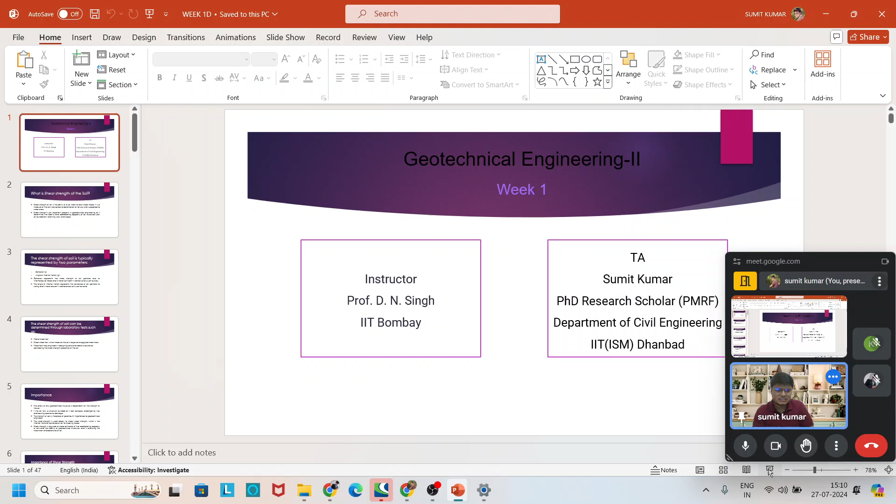Our course name is Geotechnical Engineering Two, taught by Professor D.N. Singh sir from IIT Bombay. This course has been taught with so much simplicity that if you have gone through the lectures, you understand that practical implementation is taken care of at each point during this coursework. First of all, I will start with the basic concepts regarding the course we are going to take, geotechnical engineering.

So first of all, what is geotechnical engineering? Geotechnical means in geotechnical engineering we are talking about the soil. Soil mechanics is geotechnical engineering in itself. At some places it is called Soil Mechanics 1, Soil Mechanics 2. At some places it is called Geotechnical Engineering 1 and 2. So in these aspects, we talk about soil and its characteristics.

What are the properties of soil? How does soil behave? Basically, we know that all the buildings, all the infrastructure, any road network, any railway network, every aspect of the construction business - all things are standing on the soil itself. It is not possible to imagine any structure without soil.

Have you ever imagined that in any construction work, soil is not a participant? Any structure, starting from a basic building block - in the old time, huts were constructed, and they were also constructed on soil. As advancement takes place, we created RCC structures, steel structures. In subsequent times, earlier roads were only earth work, then bricks were there, now concrete roads are there. So everything is established on soil.

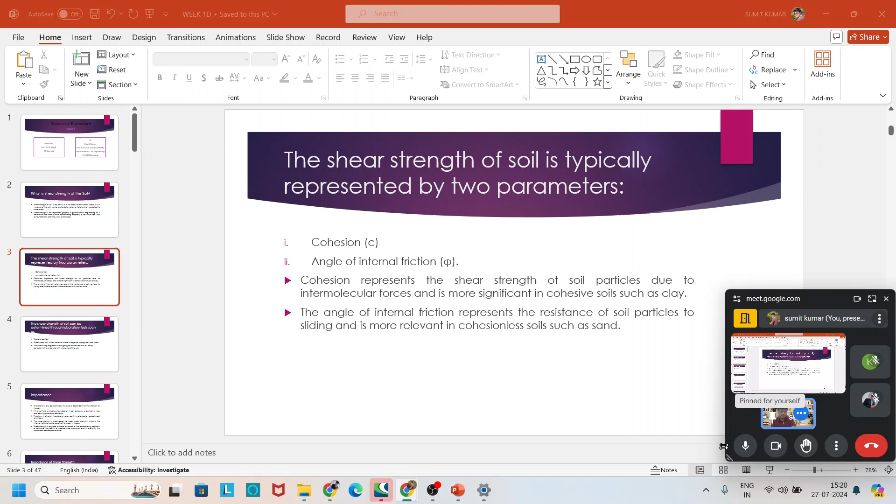As the name suggests... okay, I think I am audible. Hello, okay. So, as the name suggests, cohesion is the factor responsible for shear strength which depends only on cohesive soil. And the cohesive soils are like clay.

Now we talk about the second parameter, the angle of internal friction. The angle of internal friction represents the resistance of soil particles to sliding, and it is most relevant in cohesionless soil like sand.

So one more question arises here, because the answers lie in the question itself. If we ask a question, we get some answer. So the second question arising here is: is there some soil which might have both cohesion as well as angle of internal friction? It is not like that, no.

At some place the cohesion is 50 kilopascal and the angle of internal friction is 0, and at some other place the angle of internal friction is 30 and the cohesion is 0. This may be the case in some places, but in most cases it has been found that some cohesion factor is also there and angle of internal friction is also there. So both combine to give strength to the soil.

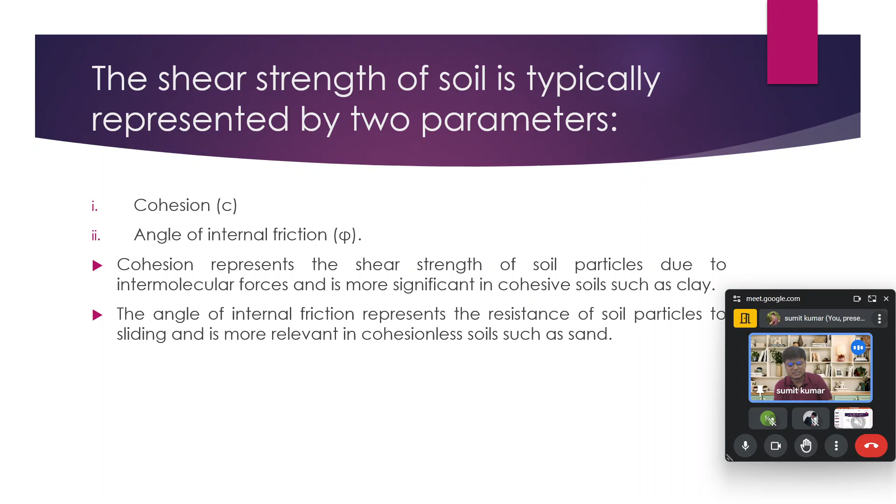Now, as I am talking about how these parameters could be found - the shear strength of soil can be determined through laboratory tests, like the triaxial test. In the triaxial test, we perform and see step by step each and every part of it, and also the direct shear test. So I will give a brief overview. In the triaxial test there are three tests: UU test, CU test, and CD test.

We will talk about that in detail in the subsequent slides, and in more detail in the next class as well, because that part of the syllabus has been covered there, and we will also solve some very good problems on these two aspects, because as per my knowledge, by the end of this course you all have to go through them.

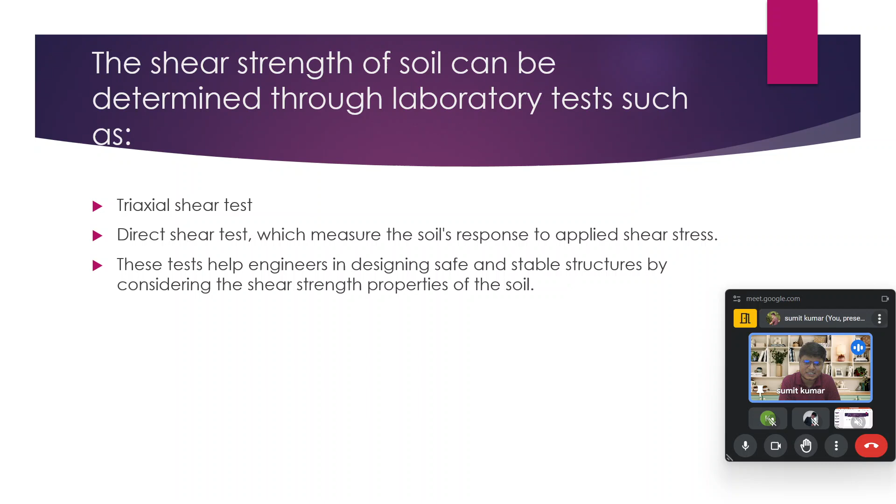First of all, we have discussed the importance, because anything which we are studying must need to have some importance. Without importance, if we are taking anything, it doesn't matter. In day-to-day activity also, we consciously or subconsciously always ask, is it important for me? Subconsciously we ask, but sometimes we also ask consciously. So conscious decision in that regard will always be helpful for us.

So I will start with the importance. The safety of any geotechnical structure depends on the strength of soil. Basically every soil has some strength, and the structures may be multi-story buildings, bridges, tunnels, roadways, or institutional buildings like schools and colleges. Everything stands on the soil. So first of all, we need to find the strength of the soil.

As you know, if some of you are working in any companies, you see that before the construction of any structure, first of all they will call for the soil report. The company does the soil investigation, does the boreholes, finds the soil parameters like the unit weight, and also finds the cohesion and friction angle. They also find how much strength is there in the soil itself to sustain the load which has been applied on those structures.

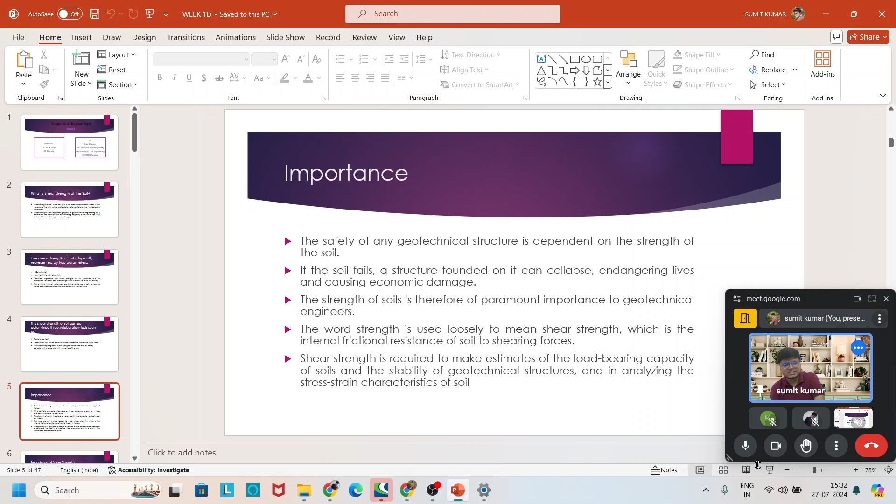Okay, I will take a pen over here, because if something needs to be added, I can add it. Let me take a laser pointer. So the shear strength is required to make estimates of the load bearing capacity of the soil and the stability of geotechnical structures, in analyzing the stress-strain characteristics.

So in the subsequent slides, in today's class itself, we are going to talk about what are the most important factors. We are talking about the Mohr circle. Okay, am I audible now? Hello? Yes.

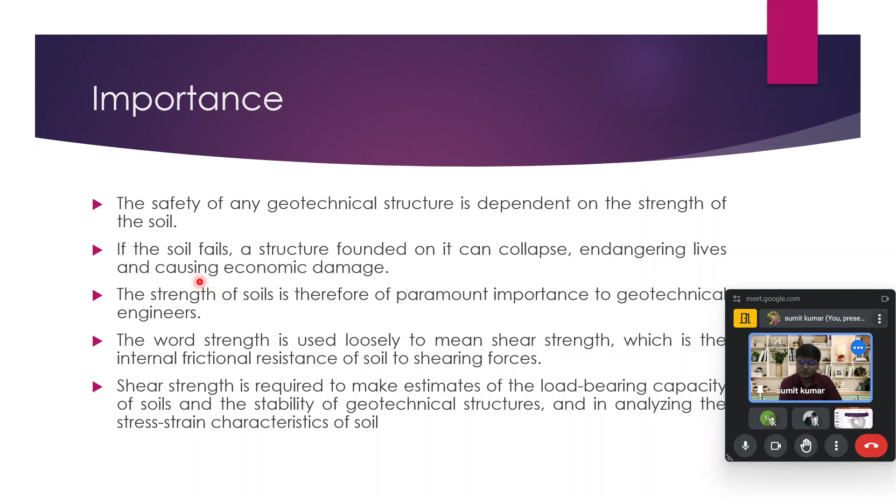Okay, so now we talk about the importance of shear strength. The shear strength is a critical factor in geotechnical engineering, as it determines the stability and behavior of soil under different loading conditions. Understanding shear strength is essential for designing foundations, slopes, retaining walls, and other structures, because everything depends on the soil, and the soil has strength - that is the shear strength - which amplifies the factor of safety and determines how much load it can sustain.

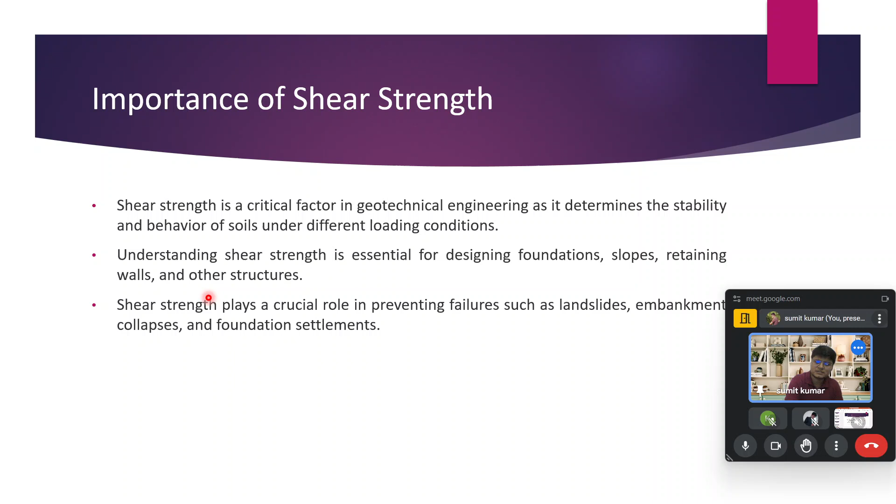Now we are going to see some diagrams with the help of which you can understand these factors very easily. The shear strength plays a very crucial role in preventing failures such as landslides, embankment collapse, and foundation settlement. Knowledge of these factors will help us understand the extent of damage we could reduce before designing structures over those soils.

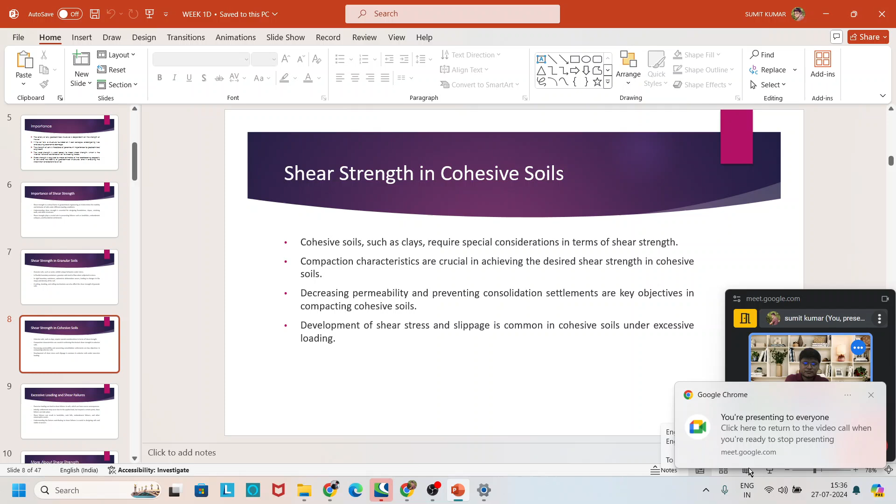See, my slides are visible now. Okay, no problem, I think so. Slides are visible. Let me check again because I don't get you. Okay, so it's okay, it is visible. I can see from my system as well. Okay, so we are talking about the shear strength of cohesive soil. Let me recall this slide as well, because I think some connection problem is there.

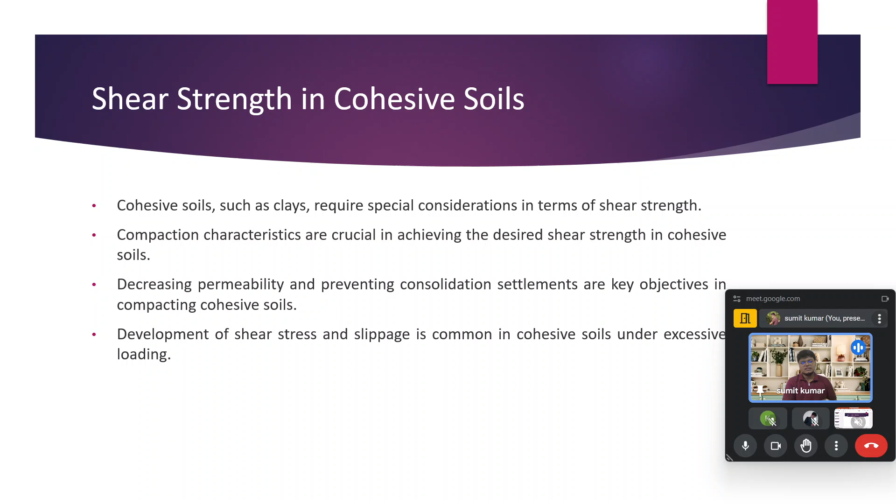So the shear strength in cohesive soil. Cohesive soil such as clay requires special consideration in terms of shear strength. Compaction characteristics are crucial in achieving the desired shear strength in cohesive soil. Decreasing permeability and preventing consolidation settlement are key objectives in compacting cohesive soil. Development of shear stress and slippage is common in cohesive soil under excessive load.

Okay, now we'll go ahead to talk about excessive loading and shear failures. Okay, I have doubt whether the slide is visible to you or not. Let me reshare my screen because I don't get you. I will stop sharing and reshare my screen.

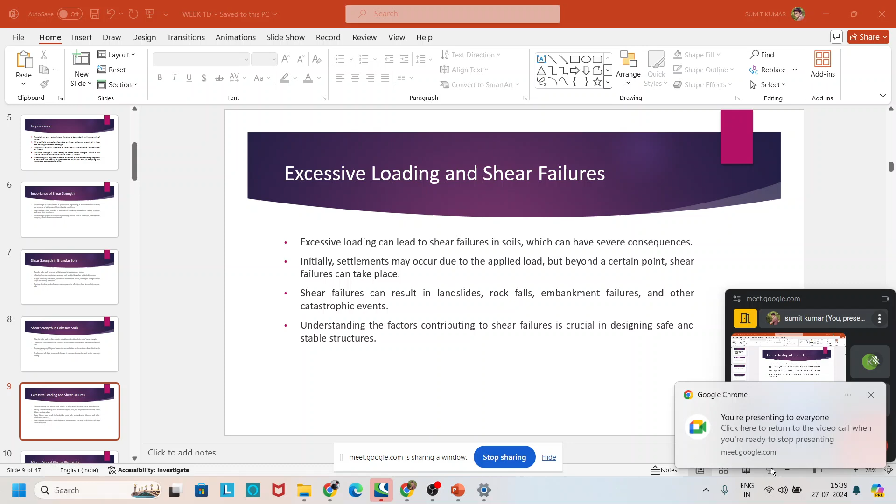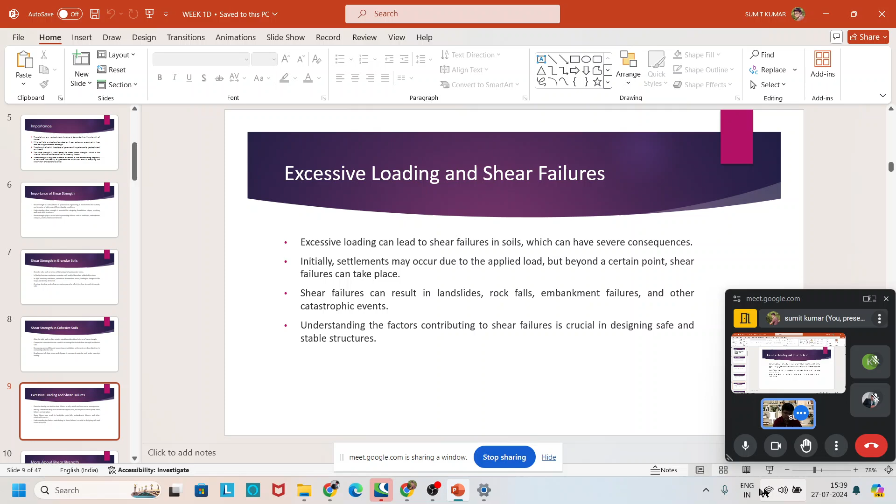Okay, excessive loading and shear failures. Is this slide visible now? Yes. Okay, so excessive loading and shear failures.

Excessive loading can lead to shear failure in soil, which can have severe consequences, because if the load applied is more than the allowable load, it will lead to failure of soil, leading to damage to the structure. Initially settlements may occur due to the applied load, but beyond a certain point, shear failure can take place. When we talk about strength, as we are most aware, like for example, a structure which can sustain.

Take an arbitrary example. For example, if a structure can sustain a load up to 100 units, so if we apply 90 units, it will sustain, there is no damage. We apply 95 units, no problem. 96 units is also acceptable. If we apply 99.99 units of load, it can sustain in that position without any problem. But if we increase the load from 99 to 100, it is on the verge of failure. And if the load just exceeds from 100 to 100.1, it will collapse.

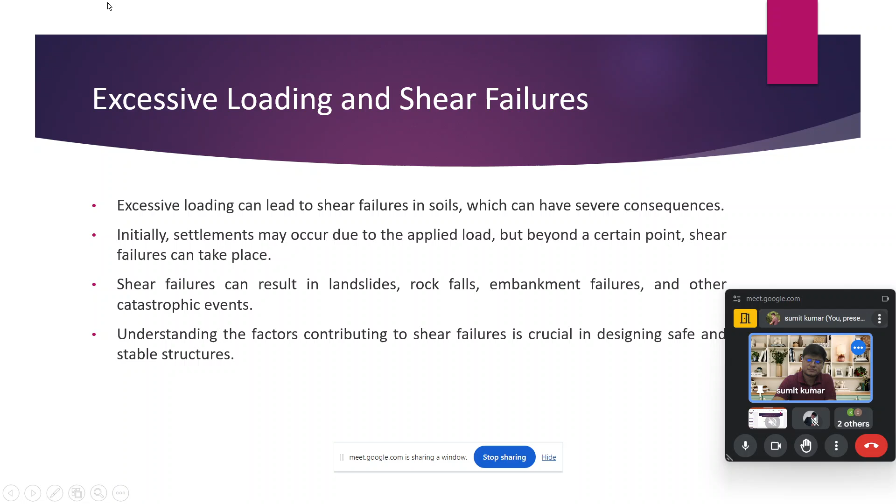Okay, so excessive loading can lead to settlement and shear failure.

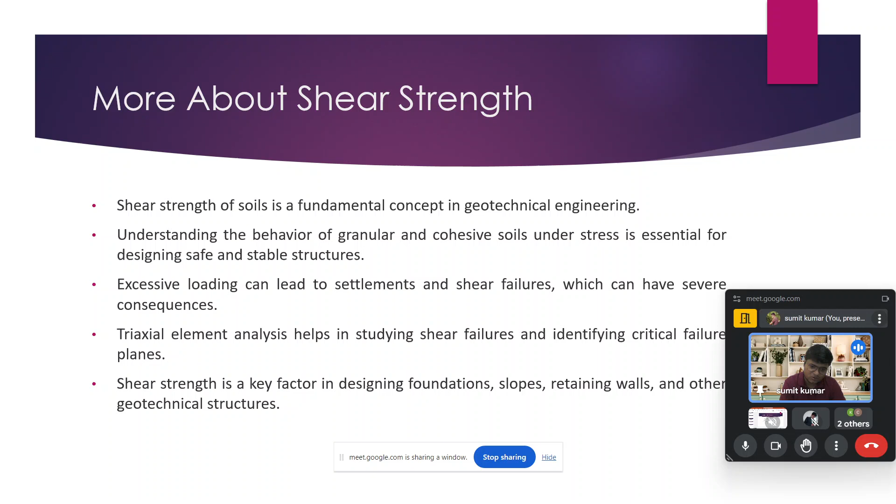The shear strength is one of the key factors in designing the foundation, slopes, retaining walls, and different geotechnical structures.

We talk about the state of stress in soil. The state of stress in soil is described by the normal stress and shear stress. We will talk about how we calculate it, how we find the principal shear stress, how we find the maximum and minimum, in the Mohr circle how we find the origin, and how we find shear stresses like Tau max. We are going to discuss all these things in today's class, and some problems are also there at the end of the slides.

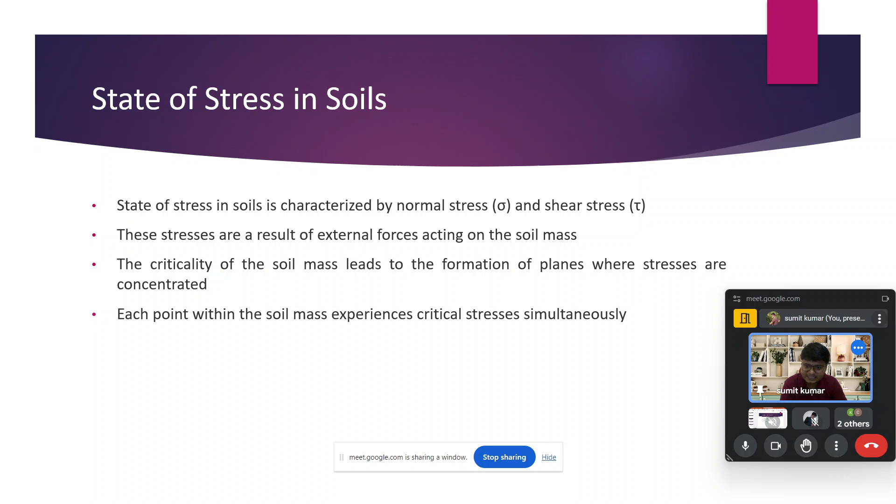The stresses are a result of the external forces acting on the soil mass. The criticality of the soil mass leads to the formation of planes where stresses are concentrated. Each point within the soil mass experiences critical stresses simultaneously, as I have discussed in class, if you have gone across the video.

See, the load has been applied, and if you can imagine this 3D body, you can see that failure takes place at a point. The load is applied over there, and there is a section which has been detached from the original body, and another section.

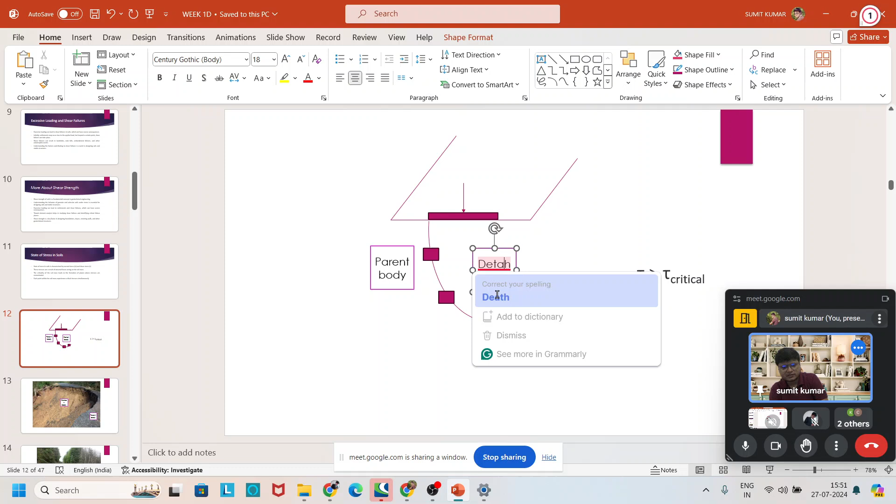I think it is visible to you now. So one is a detached body, some spelling mistakes in there, no problem. I think now it is visible and clear to one and all. So one is the parent body and the other is a detached body.

You can see from this slide the load has been applied, and as I discussed in the earlier example, the load is applied to the overall structure, but it fails from a specific section - that section is the critical section. During the stress calculation, we have to find the critical surface from where the failure takes place, and after determining that critical surface, we are able to find how much load it can sustain, because the minimum load it can sustain will be said to be its strength, since failure takes place from that section.

So if we construct any structure and the load is more than that, it is going to fail. In no case are we able to save our structure. So it is very important to understand how much load we could apply on any structure before its failure.

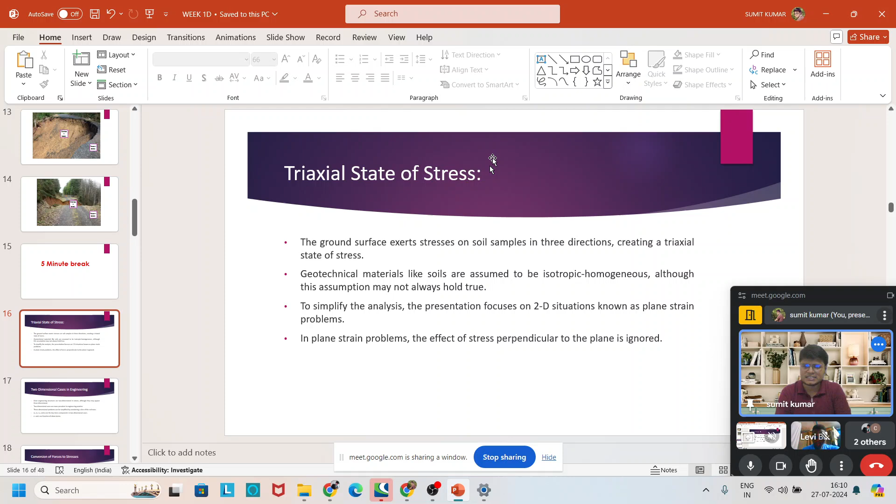I will go two slides back to the image I discussed earlier, since I found two more new people have joined. I will start from the basic aspects there, so that no one misses anything and no one feels it is an entirely new topic.

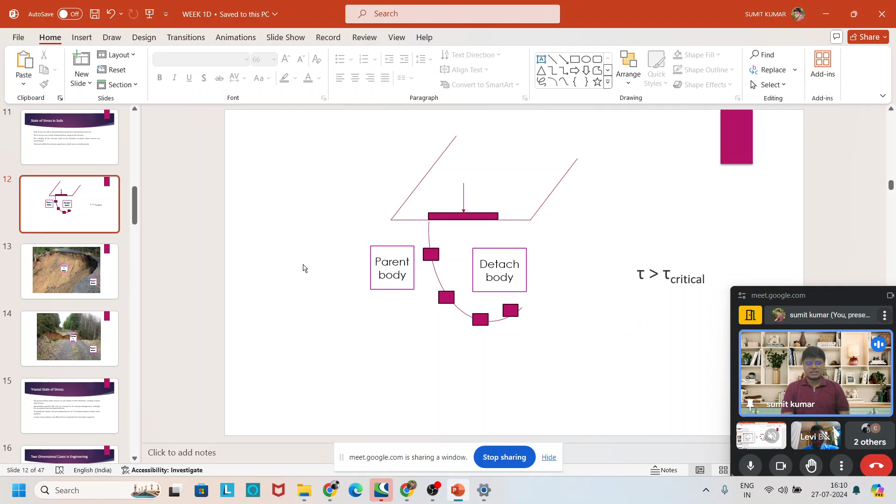Okay, so over here we are discussing about the state of stress, and after that we came along the failure surface. We talk about tau and tau critical. We discussed that when a load is applied on soil, failure takes place from specific places, not just anywhere, so we have to identify the critical surfaces. In the triaxial test, we are able to find the critical sections from where the failure takes place.

From this diagram you can see real images in the subsequent slides. The parent body remains at itself and the body that gets detached will be on the right hand section. So some amount of stress has been applied there in order to detach this body. If the force is not there up to the extent that overcomes the strength of the soil at that place, it is not possible that failure takes place at this point.

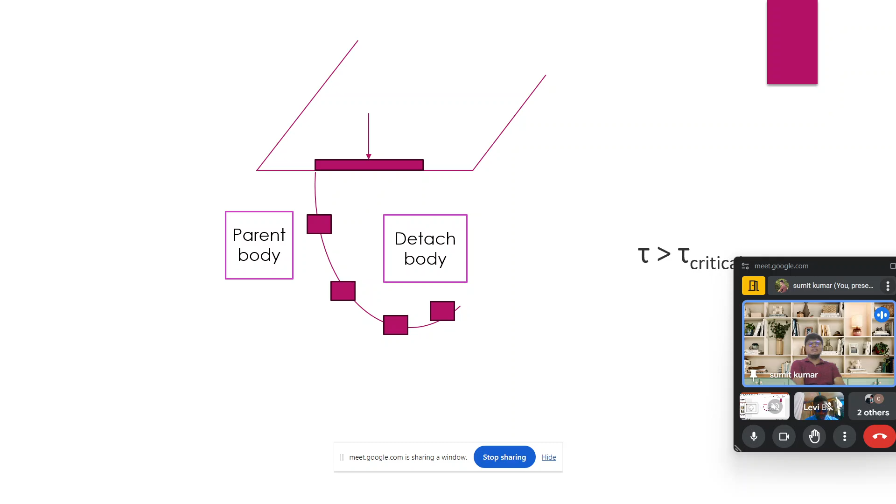So the applied force, tau, is above the critical force. The critical force is the strength of that soil which it can withstand, so failure takes place at that section. You can see the images here too. The detached body and parent body are clearly visible, and you can find that the detached body gets separated from the parent body from a specific section, not just from any section. So in one way we can say this is the critical surface from where the failure takes place.

So for the strength of soil, if you take cross sections of 5 or 6 meters, or maybe 10 or 20 meters, say in a 20-meter section, this is the most critical section. Over there the strength is minimum, so the soil gets failed from here.

Okay, okay, I think so. Okay, so I will move ahead.

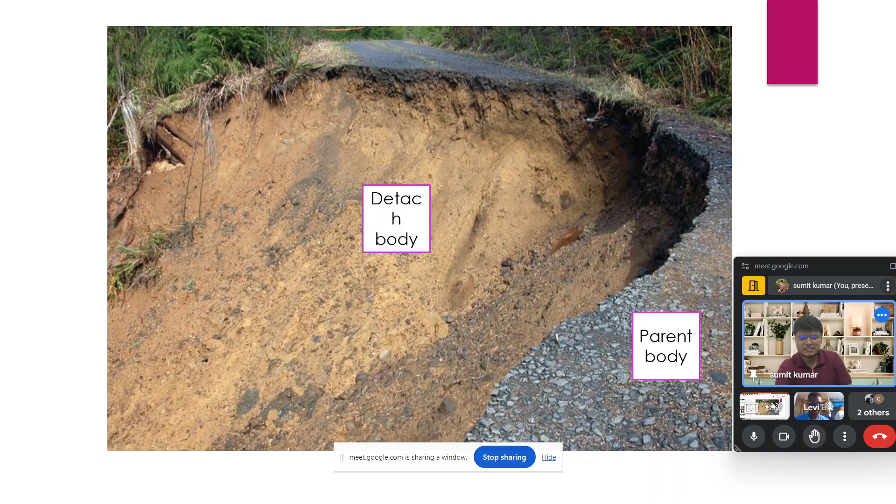So this is the similar diagram again. Over there, the parent body, detached body, and critical surface - I discussed this thing earlier before taking my break. So I will discuss briefly here for the new person who joined. I found two new people joined in the meanwhile, so that's why I will discuss again. So I will go ahead.

Okay, so we talk about the triaxial state of stress. From here onward, we will discuss the triaxial state of stress. Over there, we will discuss the Mohr circle problem - how it gets solved, how we are able to find the maximum principal, minimum principal stresses, how we find the maximum shear stresses, and subsequently we will end today's class. Afterwards, we will meet in the next class.

At the end of this class, we will solve some numerical problems, which are the key aspects we bring from today's class. And in subsequent classes, we will discuss tests and the problems generated on the basis of those tests.

Okay, so I start from the triaxial state of stress. The ground surface exerts stress on the soil in three directions, creating the triaxial state of stress. Geotechnical materials like soils are assumed to be isotropic and homogeneous, although this assumption may not always hold true. We know this from basic soil mechanics concepts, so I don't think it needs to be explained in that manner here. To simplify the analysis, the presentation focuses on the 2D situation known as the plane strain problem.

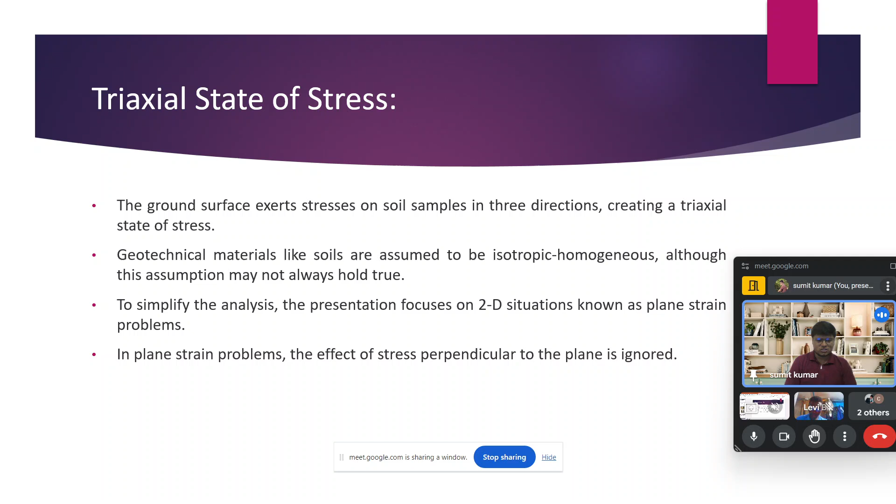So be patient and see the slides. We have taken the 2D situation known as the plane strain problem. In a plane strain problem, the effect of stress perpendicular to the plane is ignored. What I have discussed right now is that thing only.

Now we carry forward the same point, that most engineering structures are two-dimensional in nature. Although they may appear three-dimensional, two-dimensional cases are more prevalent in engineering practice. We always see that if we can do calculation in two dimensions instead of three, we always prefer the two-dimensional approach, because the calculation and problem solving is more confined and easier in two dimensions as compared to three dimensions.

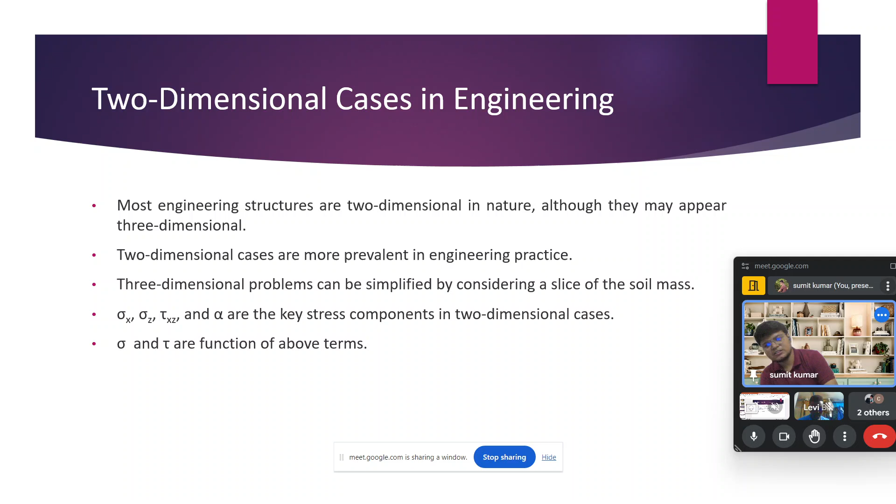Okay, I think the slide is visible clearly. So now we talk about the conversion of forces to stresses.

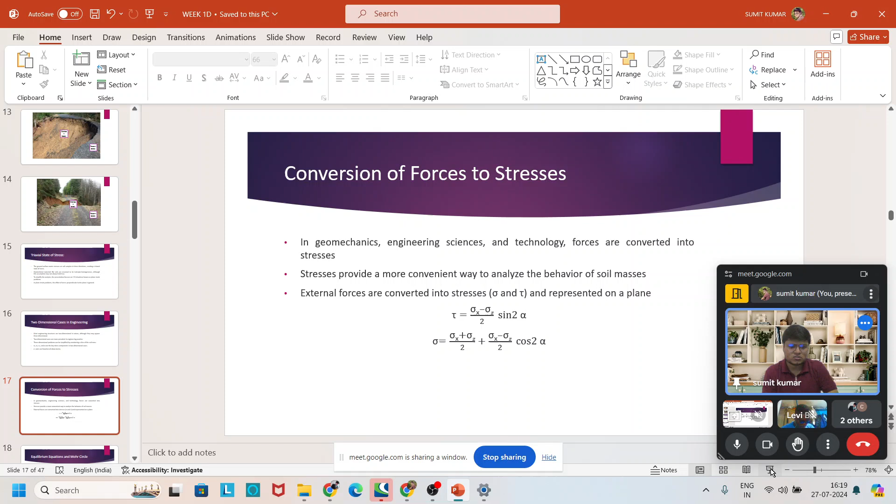So in geomechanics, engineering science and technology, forces are converted into stresses. We already know that stress provides a more convenient way to analyze the behavior of soil mass. External forces are converted into stress, that is sigma and tau, and represented on the plane.

Tau is nothing but sigma x minus sigma z by 2, into sine 2 alpha, whereas sigma is equal to sigma x plus sigma z by 2, plus sigma x minus sigma z by 2, cos 2 alpha. This is the standard relation. You must have gone through this relation in structures as well.

We will derive this relation also in the coming classes, but as of now you will understand this through the Mohr circle. I will explain up to that extent. Afterwards, during the course, we may derive these relations, but depending on our aspects, we may not derive them, we may cover more problems instead, so the derivation part you can go through from the lecture of the sir. But if that's not possible, I will cover it here as well. We will see how much time we get to cover those aspects. As of now you know this formula, and I think you would have derived this relation during your strength of materials class.

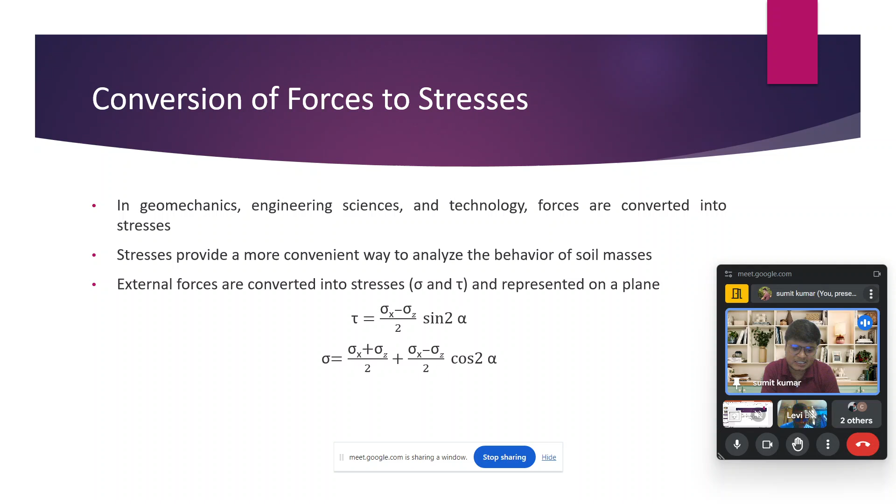And how are we able to calculate this in the other form? We also know how we are able to find the origin of this Mohr circle, and with the help of the knowledge of sigma x, sigma z, tau xz, which we talked about earlier, we are able to find everything required.

Because I studied a relation interrelating sigma 1 and sigma 3, as sigma 1 equals sigma 3 tan square (45 + phi/2) plus 2C tan (45 + phi/2). You can see, if you know sigma 1, sigma 3, or one of the aspects C or phi, and you know the soil is cohesive, so phi is 0, you can actually find the cohesion if sigma 1, sigma 3 is known.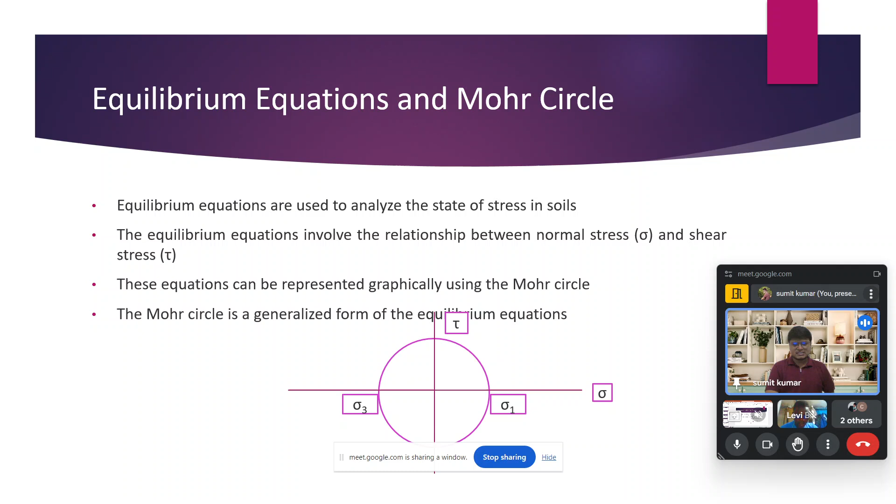So we will go ahead in that direction. If you are aware, you understand what I said. If you are not aware, that's not a problem, not to worry, because those aspects we will discuss in this coursework.

I will talk about some more points about the Mohr circle before moving to the Mohr circle itself. This presentation introduces the Mohr circle as a graphical tool used to analyze the state of stresses. The Mohr circle helps us determine the stress components sigma and tau at a given plane inclined at an angle alpha.

And what is that? The physical representation is also there; in the subsequent slide I will show that. And the steps to solve the problem using the Mohr circle are also one of the methods. We also solve the problem analytically, which is one of the analytical methods.

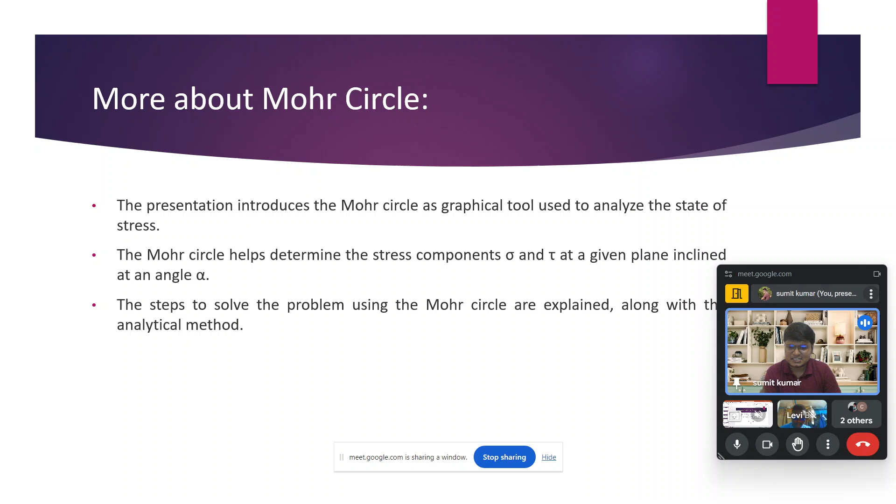With the help of the analytical approach, we solve the problem to find sigma 1, sigma 3, and sigma and tau. Okay, talking about the property, the Mohr circle must have some properties. What are those properties?

The Mohr circle is known to be one of the powerful tools for understanding the state of stress in materials, applicable to different materials like soils, rocks, and composites. We talk about these factors in the strength of materials course as well, because composites and other materials are applicable there too.

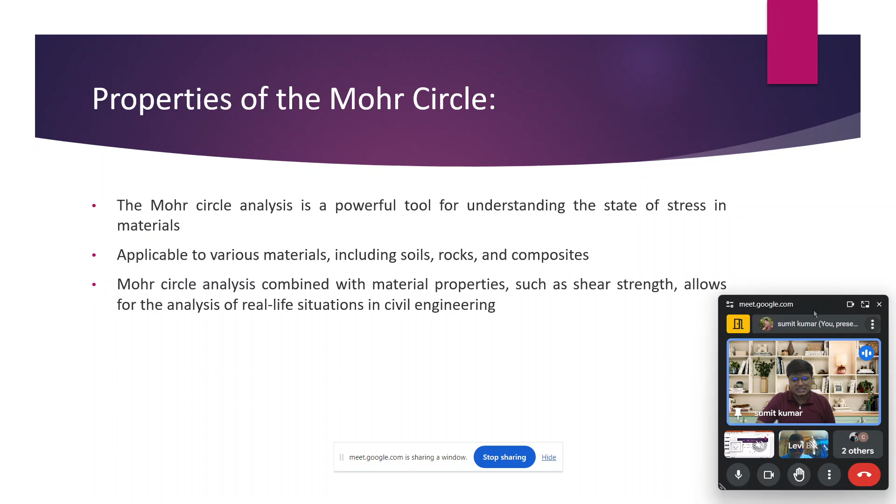And here the soil is a three phase system: solid, liquid, and gas. So it is also applicable here. Mohr circle analysis combined with material properties such as shear strength allows for the analysis of real life situations in civil engineering.

Okay, now I will show one of the images to you, so with the help of that you will get a little bit of an idea of what we are going to talk about.

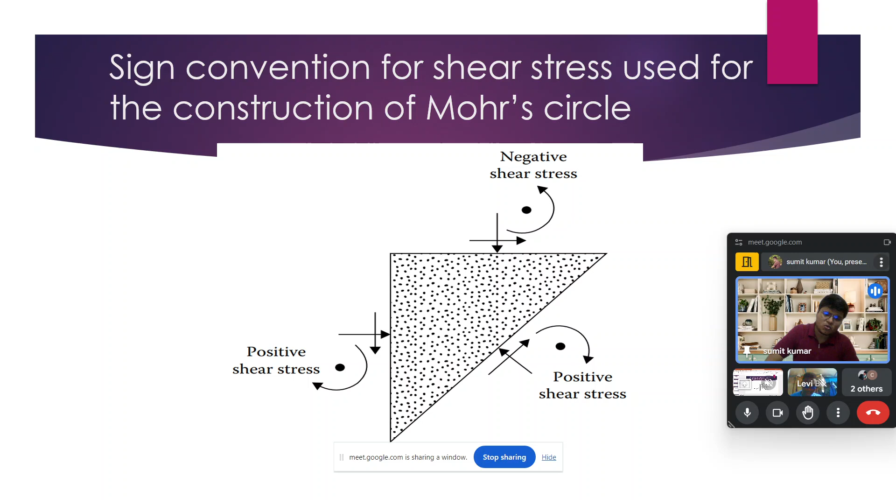So, the sign convention for shear stress used for the construction of the Mohr circle is shown over here, the positive shear stresses, the negative shear stresses, and how we found alpha. Everything we will see in the subsequent slides one by one.

So, the shear failure is one of the simplified solutions, and it is a common mode of failure in soils. In simplified solution, the focus is on the shear failure and the rigid body behavior. The Mohr circle is used to analyze the state of stress in soil undergoing shear failure.

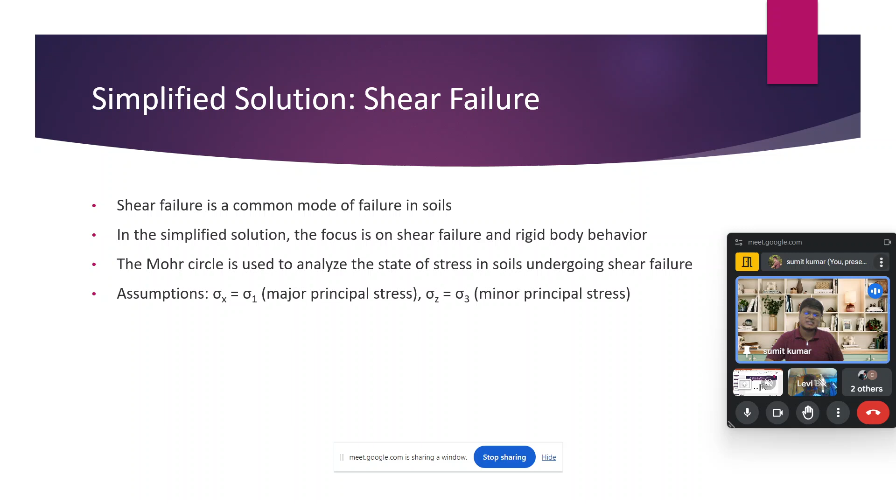There are some assumptions here, like if sigma x is considered to be sigma 1 and sigma z is considered to be sigma 3, that is the major and minor principal stresses respectively. You will see this with the help of a schematic diagram as well. I will show you in subsequent slides.

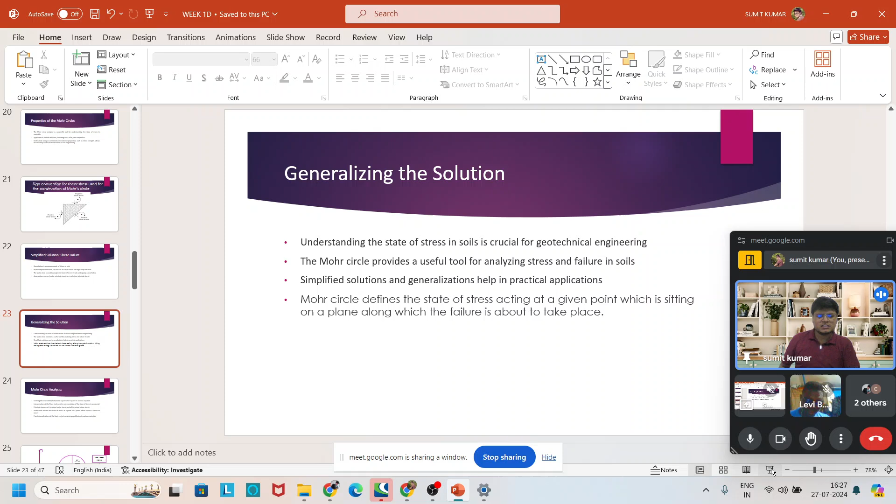We are talking about a generalized solution. We have said that the Mohr circle is a generalized solution. So, understanding the state of stress in the soil is critical for geotechnical engineers. The Mohr circle provides a useful tool for analyzing the stress and failure in soil. The simplified solution, generalizations help in practical applications.

And how it will help, we will see with the help of some examples. We will solve some problems and we will be able to see how that will help in solving real life problems.

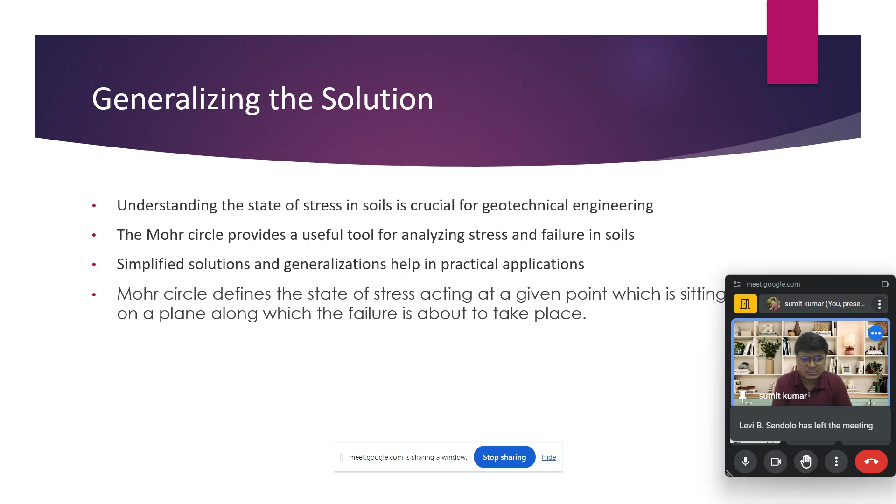The Mohr circle defines the state of stress acting at a given point which is sitting on a plane along which the failure is about to take place. And talking about the Mohr circle analysis, we derive the relationship between sigma squared and tau squared as a circle equation, and how it happens we will see with the help of a schematic diagram.

The interpretation of the Mohr circle and its representation of state of stress in a material, as we talk about the principal stresses, sigma 1 is said to be the major principal stress and sigma 3 is the minor principal stress. The Mohr circle defines the state of stress at a point on a plane where failure is about to occur, so we are able to find the critical section from where the failure is going to happen, and the practical application of the Mohr circle is analyzing the equilibrium in various materials.

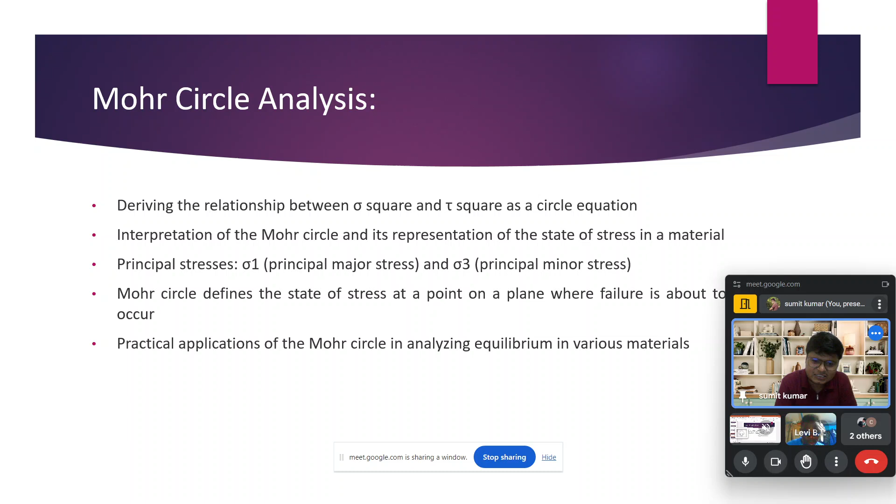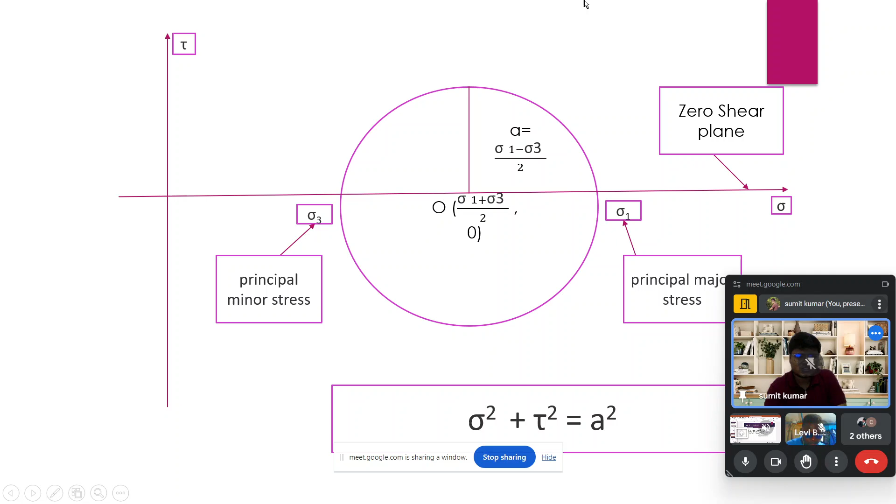Okay, so now I will show you one of the images. With the help of that you will get a better understanding. Give me a minute, I'm not able to move my slide due to some problem. Okay, I think the image is clearly visible to you now.

Yes, so you can see here the Mohr circle has been drawn. The x-axis is the sigma axis and the y-axis is the tau axis. As I already said, sigma 1 is the principal major stress, sigma 3 is the principal minor stress, and the normal axis is where the shear stress is 0.

From simple mathematics, you also know that for any point on the x-coordinate, the y-coordinate is 0. So you can see the principal major stress point sigma 1 has coordinates sigma 1, 0, while the principal minor stress point has coordinates sigma 3, 0. So it's clear that along this line the shear stress is 0 on the y-axis. That's why this axis is said to be the zero shear stress plane.

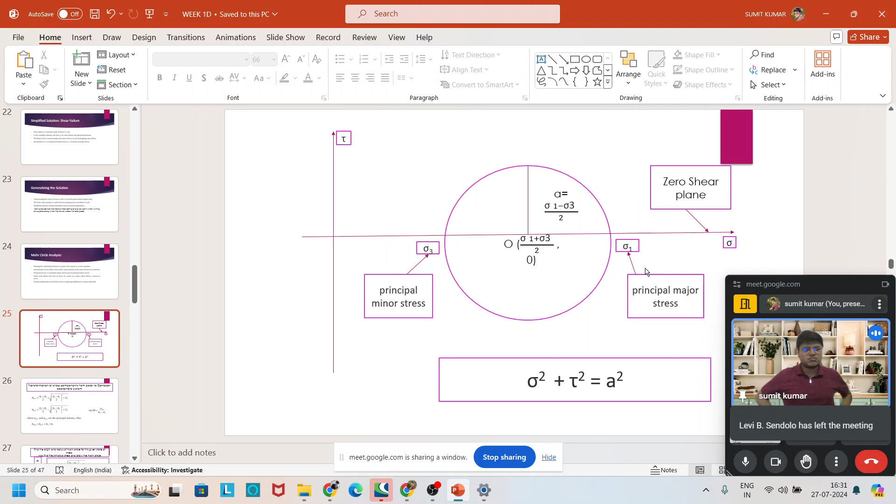One more point from this diagram: if you think mathematically, the coordinates sigma 1, 0 and sigma 3, 0 on the x-axis - if we subtract these two points, sigma 1 minus sigma 3, we find the diameter of this Mohr circle. And dividing the diameter by 2 we find the radius of the Mohr circle, and that radius value is nothing but the maximum shear stress, as you can see from the image itself.

Now one of the interrelations I am talking about is that sigma squared plus tau squared equals a squared, which is the radius of the circle squared - this is also established from this diagram.

Okay, now I will discuss some interrelations which I was talking about earlier. So what are these interrelations? I think all of you understand the diagram very clearly now, and how sigma 1, sigma 3, and the radius - everything I have discussed. So now I will move ahead with the interrelation, that is sigma p1.

If sigma x, sigma z are known to us, and tau xz is known to us, it is not just about x and z generically. It depends on the plane which we are considering. If we are considering the xy plane, it will be xy terms. If we are considering the yz plane, it will be yz terms. Over here we are considering the xz plane.

So sigma P1, the major principal stress, will be sigma x plus sigma z by 2, plus root under (sigma x minus sigma z by 2) square plus tau xz square. Similarly, sigma 3, the minor principal stress, will be sigma x plus sigma z by 2 minus root under (sigma x minus sigma z by 2) whole square plus tau xz square.

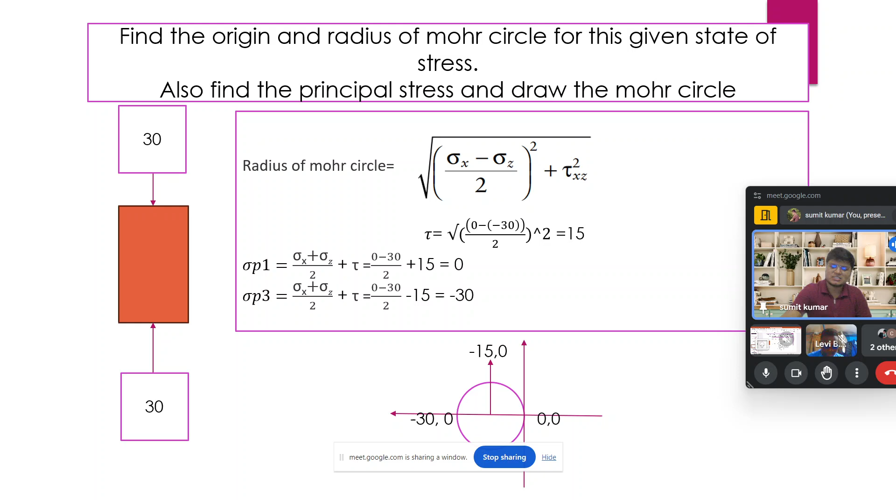We know the radius of the Mohr circle is root under (sigma x minus sigma z by 2) square plus tau xz square. When we solve it, we find the radius as 15, and sigma P1 equals sigma x plus sigma z by 2, as we remember for sigma P1 and sigma P3. I will show you again that interrelation: sigma x plus sigma z by 2 plus root under (sigma x minus sigma z by 2) square plus tau xz square. This same relation is used to find the principal stresses.

In our question, only a compressive force of 30 units, maybe 30 kilonewton per meter square, is acting. I have considered it in units only so that you don't get too confused. So over here the value of sigma z is minus 30, since in the sigma z direction the applied stress is in compression, that is minus 30.

So when we calculate, we find sigma P1 and sigma P3 as 0 and minus 30 respectively, and this is plotted on the sigma and tau axes, where sigma is the x-axis and tau is the y-axis. You can see the radius 15 has been plotted, minus 15, 0 has been represented, and 0, 0 of the major principal has been shown, and the minor principal is minus 30. I think it is very easy and everyone understands it clearly.

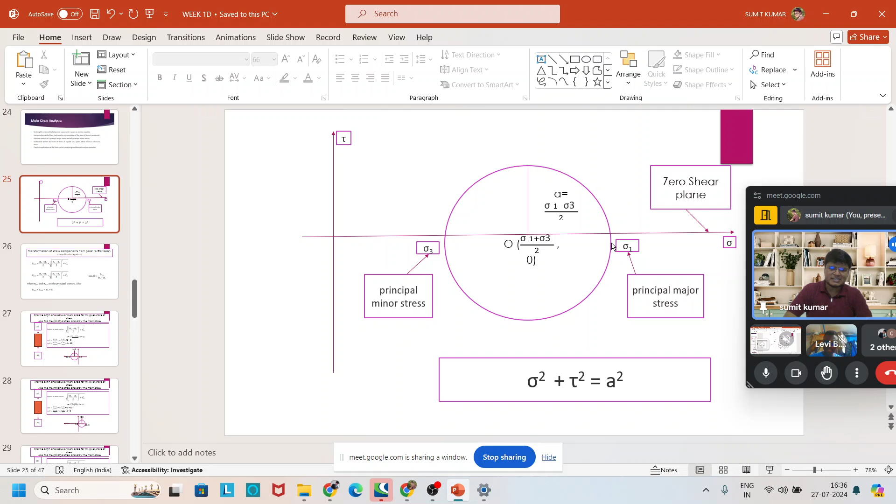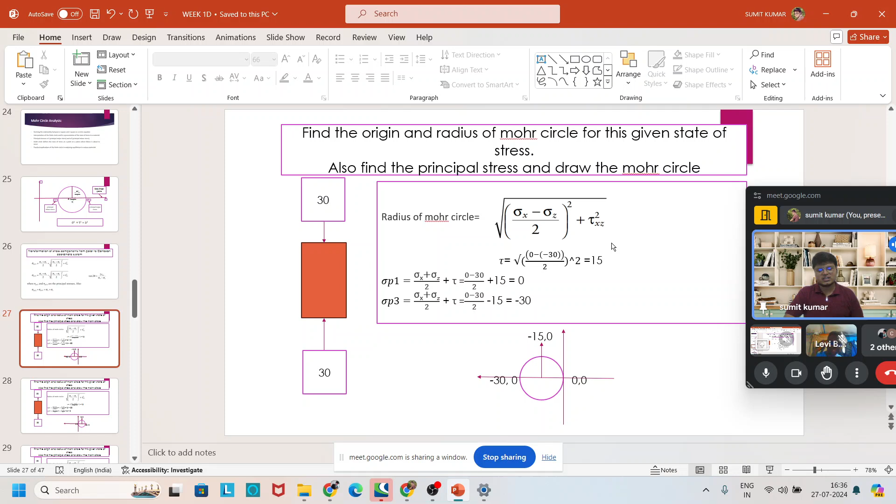So I will move to the next problem. If you have any doubt regarding this, go through this slide and the previous one very carefully, and you will be able to solve this problem very easily. If the problem still remains, you can ask me in the next class. I don't think any problem will be there if you go through those two slides.

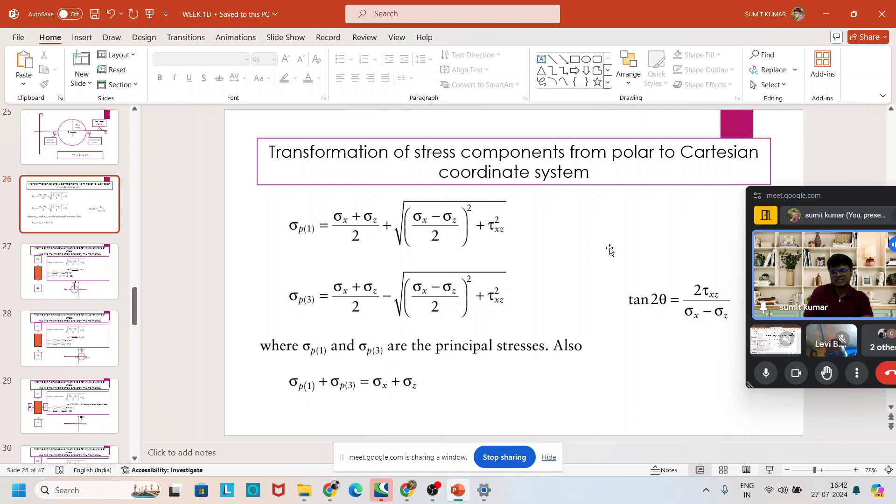I think by going through these four problems based on slide number 25's explanation, everything is clear in everyone's mind. If there is still any doubt, you can ask me.

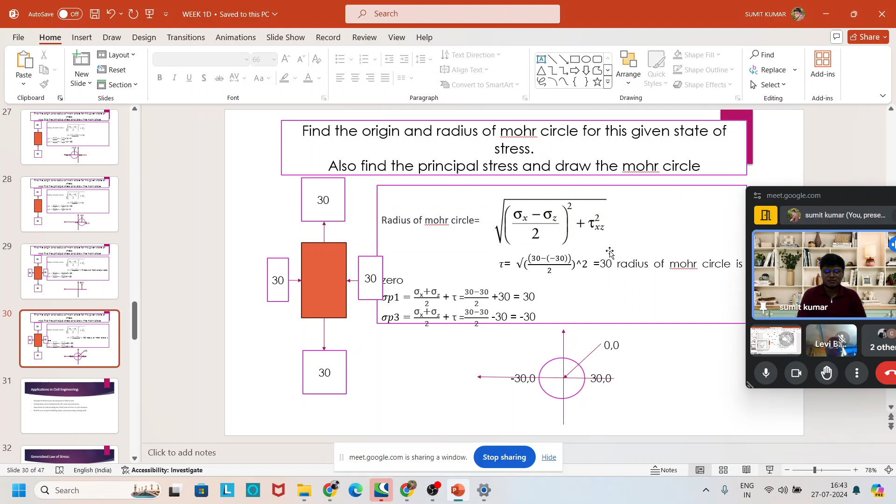First of all, solve the easy problem on any aspect. Afterwards, go into the complex aspects. So we will solve the complex problem as well. But at this point of time, I think these four problems will be understood by everyone. If any doubt is there, you can ask me in the next class after going through these four videos. So that will not be a problem.

Okay, now we talk about the application in civil engineering. Examples of infrastructure development in hilly terrain, cutting slopes, and creating the benches of roads and pavements. The importance of understanding the critical state of stress in such situations, and the real life case study of stabilizing slopes and construction of retaining walls.

So these are basically its applications, which are not limited. Its application is unlimited in itself. I have discussed from the very first time that when we are talking about shear strength, it will be applicable to one and all fields wherever any construction work is going on. Without knowing the shear strength of soil, we are not able to move a single step in our study, because shear strength is one of the most important aspects which one needs to understand before taking up design or construction activity in any field.

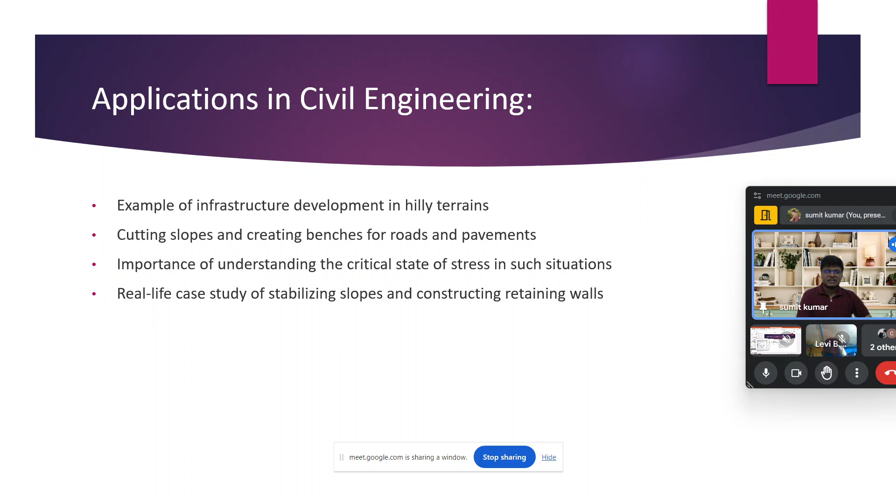Okay, now I will add one more point. I will explain to you what we mean by the passive and active state of material. Just for information, just listen to this and afterwards I will show you some problems. I will write this also during my presentation, but right now just listen.

When we talk about the generalized law, expressing the stress in terms of sigma 1 and sigma 3, and analyzing the situation where the lateral stresses are more or less than the vertical stresses, this gives the passive and active state of earth pressure. You have studied about earth pressure, or maybe you have at least listened about it. So we know that if we consider x as horizontal and z as vertical, if the stress in the x direction is more than the z direction, that is the passive state of stress.

Sorry, excuse me, give me a minute. Okay, see.

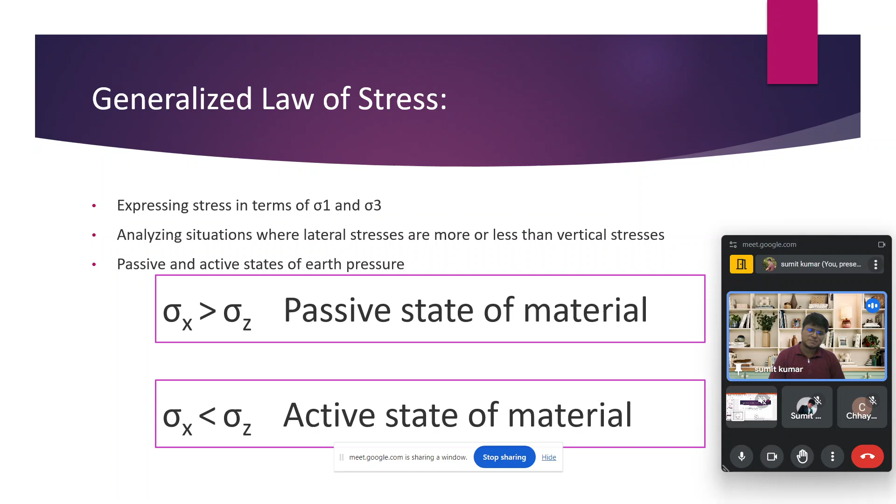Similarly, if this is the soil mass, and this is a wall, and it's moved away from the soil, basically the soil is throwing it in that direction, it will ultimately result in the active state. So you can interrelate this point, what we mean by active and passive state, and how it is related to sigma 1 and sigma 3. This is not part of the syllabus at this point of time, but as one aspect I just wanted to discuss it, so I discussed it.

I will move ahead, and I will add one more point to this, like we talk about the pole. Pole is a point on a Mohr circle. There is a point on the Mohr circle through which all the planes will pass.

A point on the Mohr circle from which all planes pass is said to be the pole, and the pole represents the state of stress on the plane inclined at the same orientation in space. Drawing a line parallel to the known state of stress on a plane through the Mohr circle, and the reverse process—drawing a line passing through the pole—determines the state of stress on that plane only.

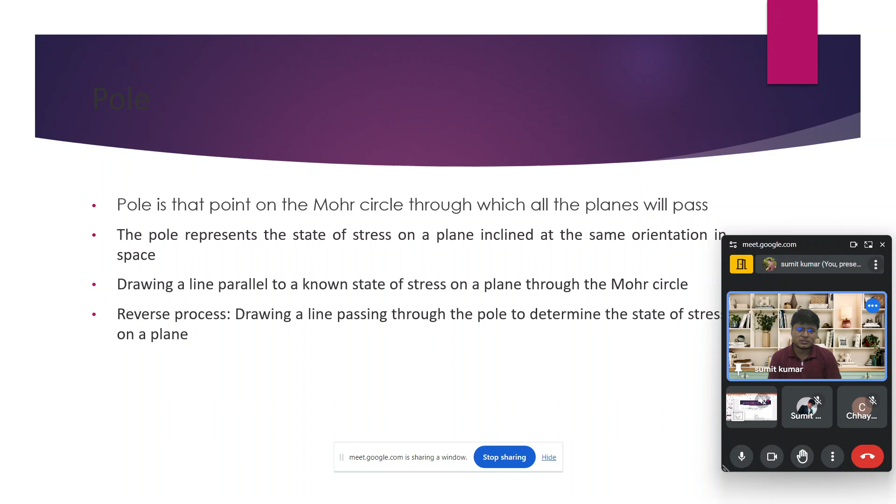Okay, so up to here I think you have listened to everything. Now I will show you some more aspects, like the generalized state of stress. We talk about the generalized state of stress, and what do we mean by this.

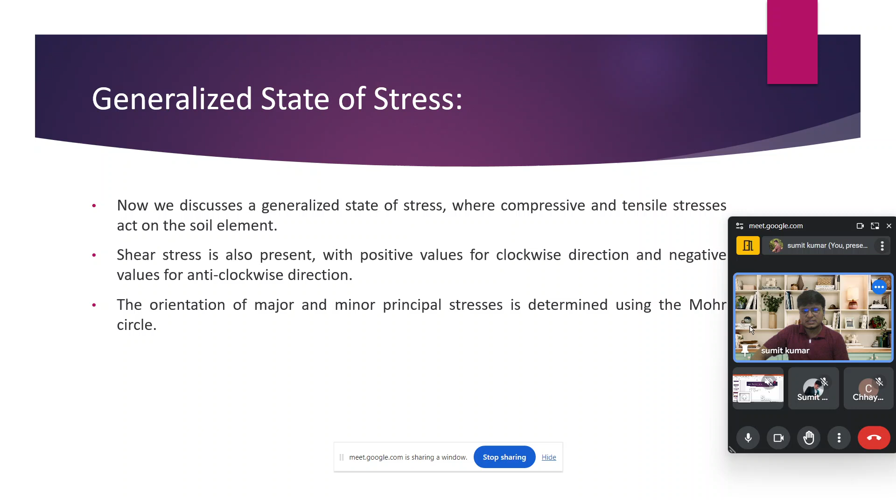When we talk about the generalized state of stress, compressive and tensile stress act on the soil element, and shear stress is also present, with a positive value for the clockwise direction and a negative value for the anti-clockwise direction. We will see what this means with the help of a problem. The orientation of the major and minor principal stress is determined using the Mohr circle, as we have seen in good examples earlier.

Now I will take one more problem, a very good problem, so you get a better understanding about these aspects. Let me discuss this problem before moving ahead.

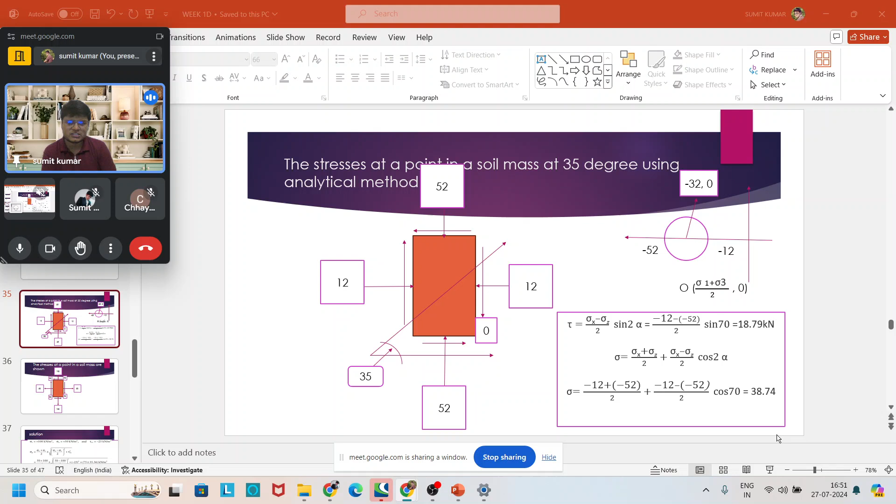So you can see the state of stress at a point at 35 degrees using the analytical method. In this problem, a compressive stress of 12 and 52 is applied on a soil mass, and a 35-degree arc plane is shown. The shear stress is acting at 0.

When finding the origin, that is sigma 1 plus sigma 3 by 2 plus 0, you can find the origin of that point. As discussed earlier, tau equals sigma x minus sigma z by 2 sin 2 alpha; the value of sigma x is compressive, minus 12, and sigma z is 52, also acting compressive, so its value is minus 52. Using the interrelation sigma x minus sigma z by 2 sin 2 alpha, the plane on which we calculate shear and normal stress acts at 35 degrees from horizontal, so alpha is 35, and 2 alpha is 70 degrees. The shear stress is found to be 18.79 kilonewton after calculation.

Similarly, sigma equals sigma x plus sigma z by 2 plus sigma x minus sigma z by 2 cos 2 alpha. This interrelation was shown in an earlier slide, maybe around slide 30 or before—I don't remember exactly—but I showed it earlier. This interrelation is used to find the shear stress and normal stress at a plane 35 degrees from horizontal, given that the stress in the x direction is 12 and in the y direction is 52, both compressive.

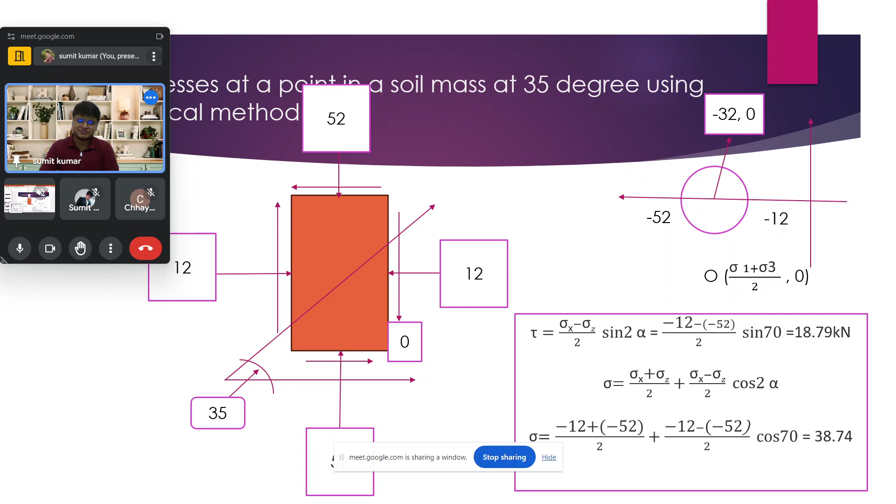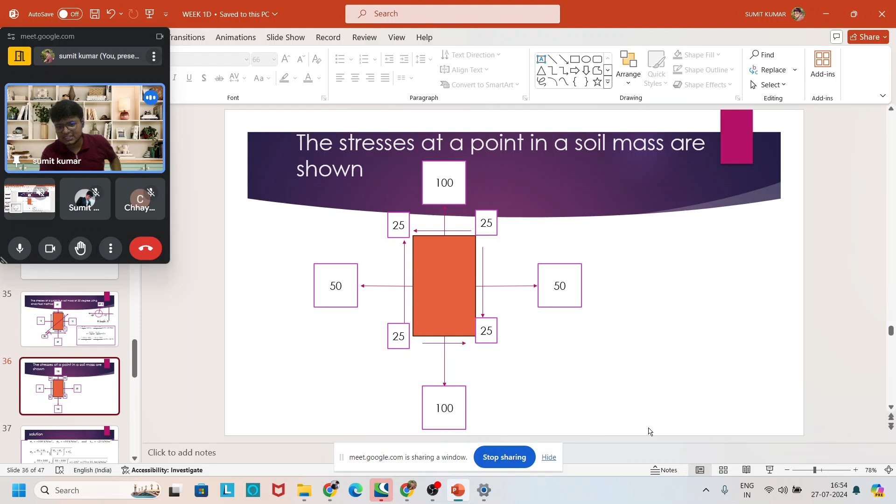So what is the problem asking? I have not written what you need to find, so let me state it here: we have to find the principal stresses, major and minor principal stresses. How are we going to find them?

We use our interrelation: sigma z, sigma x, tau xz are known to us, and sigma p is calculated using sigma x plus sigma z by 2, plus root under sigma x minus sigma z by 2 square plus tau xz square, as sigma p1, the major principal stress. The plus minus is written and the calculation carried out to find the value of major and minor principal stress.

This is found to be 110.36 kilonewton per meter square and 39.64 kilonewton per meter square. Everything is presented in a very clear manner, so there should be no doubt in anyone's mind regarding this.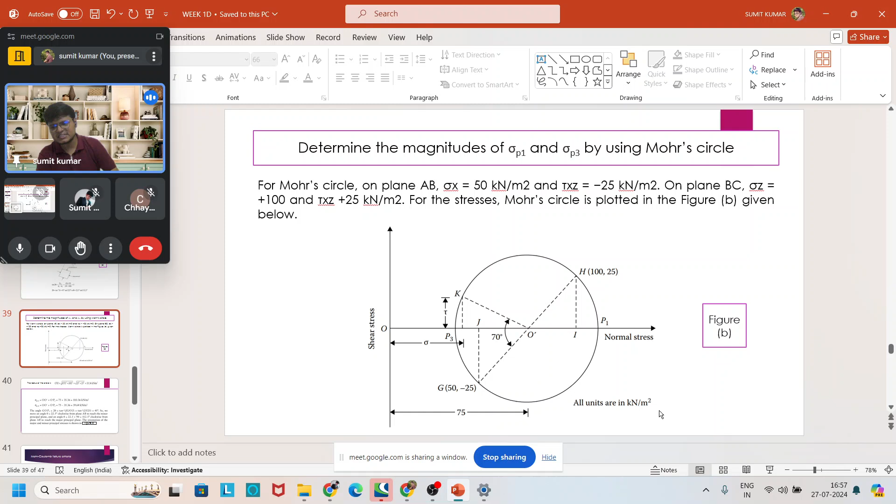First of all, we have found sigma p1 and sigma p3. On that basis, you can see sigma x minus sigma z by 2. I will also explain this in the next class because it also requires some time. I don't want to rush it, so you can go ahead with the solution, but I will discuss it in the next class.

I will first of all focus on finishing today's lecture on time so that the problem doesn't arise where sometimes the lecture gets closed as time runs out. I don't want such cases, so I will move ahead first of all.

So we are talking about the Mohr-Coulomb failure criteria. The functional relation between the normal and shear stress on a failure plane can be given as shear strength as a function of stress. We also know that the Mohr-Coulomb failure criteria relation is given as shear stress at failure, S equal to shear strength equal to C plus sigma tan phi.

As I discussed earlier at the very start of today's class, cohesion and angle of internal friction are two of the most important parameters which one needs to understand before stating any point regarding shear strength. And as we know, these parameters are the most important, which must be found with the help of tests performed on soil.

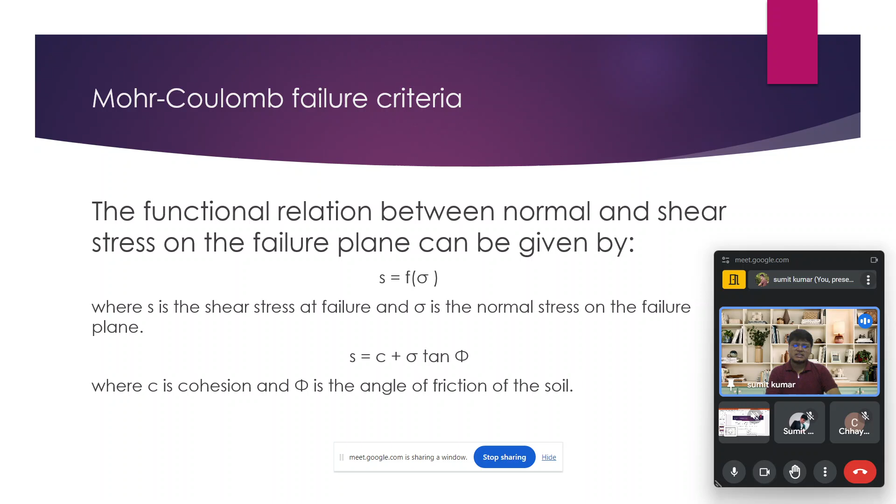The interrelation is S equal to C plus sigma tan phi, where C is the cohesion and phi is the angle of internal friction. When we talk about shear strength, it will be plotted on the y-axis and normal pressure on the x-axis, with the relation S equal to C plus sigma tan phi. Phi is the inclination, the angle made with the horizontal, and C is the cohesion intercept; the interrelation is thus established as S equal to C plus sigma tan phi.

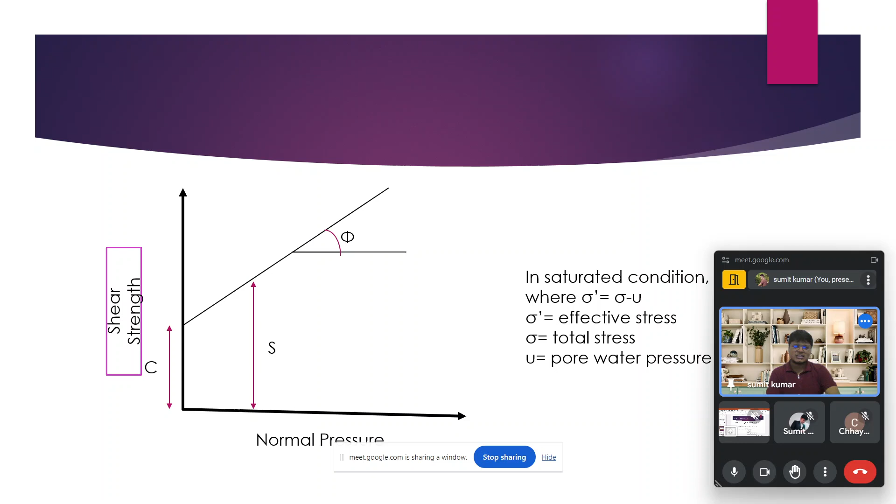I think this thing is clear in your mind. Now I will state some key terms. What are the key terms? Some are the terms which we need to understand, like the shear strength.

First of all, I will define in one line: the shear strength of a soil is the maximum internal resistance to applied shearing forces.

The effective friction angle - what is it? Phi. We say C dash and phi dash, that is the effective friction angle and effective cohesion. We will discuss the difference between C dash, phi dash and C, phi. But at this point, the effective friction angle is a measure of shear strength of soil due to friction.

And the cementation characteristic is one key term - cementation is a measure of the shear strength of soil from forces that the cementation process applies in order to give a specific strength. But that's not an important point, leave it.

Cohesion. Cohesion is a measure of intermolecular force. As discussed earlier in today's class, cohesion acts due to the intermolecular forces. And cohesion and apparent cohesion are the two points.

So what do we mean by apparent cohesion? It is also one of the important things we need to understand. Apparent cohesion is the apparent shear strength at zero normal effective stress. As we see, the zero normal effective stress will be the stress over the y-axis. So at that point, the cohesion is there - that is said to be the apparent cohesion.

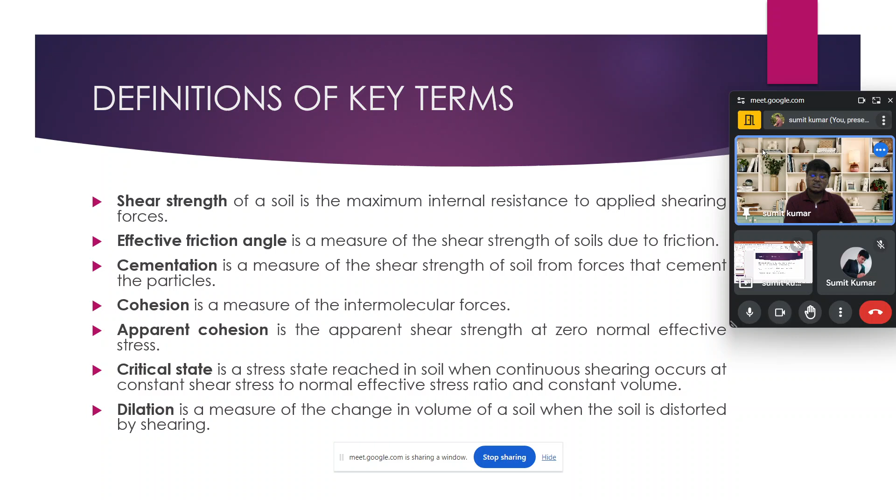Now I will conclude today's lecture by discussing what outcomes we bring from today's lecture. I will say it quickly. First of all, we discussed the course Geotechnical Engineering 2, which focuses on understanding the shear strength of the soil. So today we understood the shear strength of the soil.

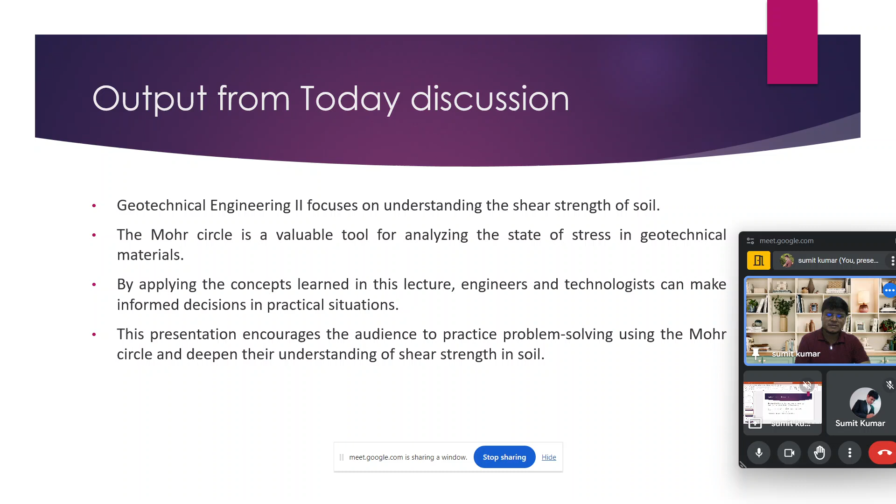The Mohr circle is also one of the valuable tools for analyzing the state of stress in geotechnical materials. By applying the concepts learned in this lecture, engineers and technologists can make informed decisions in practical situations. So the presentation encouraged the audience to practice problem solving using the Mohr circle and deepen their understanding of the shear strength of the soil.

Now I will leave you with some questions which we already discussed in today's class, but you need to answer them. I suggest you write these questions by yourself before the next class, so you will get a better idea and better understanding of what we have learned today.

So the questions I have given for you are like: what is meant by the shear strength of the soil? What are the factors that affect the shear strength of the soil? And what is the Mohr circle? What properties does the Mohr circle have? And as I have given four problems, I will ask you to solve at least four problems from any book based on the Mohr circle.